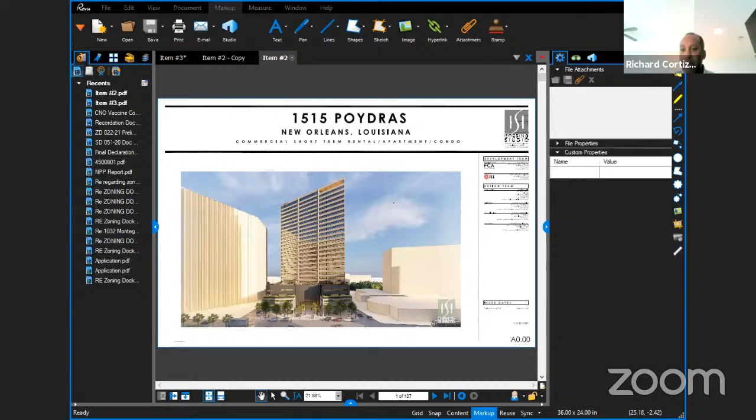Richard, are you concluded? I'm concluded, Chuck. Thank you. I'm sorry, thank you. Good morning, everyone.

This is Chuck Travis. I'm a principal with the Housing Studio, and we're the architect for the project. We have our entire design team with us today. Once we get into the discussion a little deeper, our various team members can jump in and give you additional detail. First, we're going to start with the video that we've sent you.

Hopefully you had a chance to see it, and if not, we're going to start with that. I'll give you a high-level overview of the changes we've made since our last meeting in May. There were 4 main areas that we're going to be talking about.

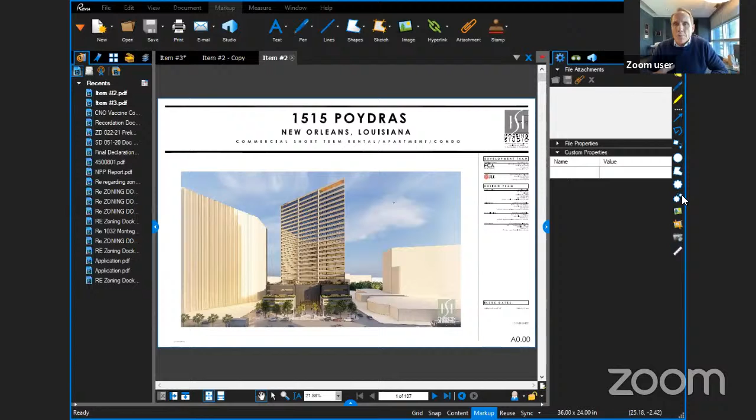If you went through the presentation package, on page 2, sheet A0.01, we tried to capture all the comments you gave us from our last meeting and give you responses to help guide you through the set. We took those comments very seriously, and after going through the design process for the last few months, we thought they were extremely right on point. We took no exceptions with them.

In fact, you empowered us to go further and push the project to the next level, which I think will really show today when we give you this presentation. The 4 areas that I want you to be mindful of as we go through this video to start.

The first one was dealing with the pedestrian motor court. There were several comments last time about this being primarily used for pedestrians during game day events. What's extremely important as we transition this building from an office use to a residential use is that we create a front door to the street there at Poydras. This gives us the opportunity to drop off and pick up residents, and we tried to be mindful of both uses and needs, so we've made that area highly programmable.

The other is the streetscape. That was something we discussed last time about some of the aging landscaping material in need of replacement and repair. Also, your concerns about ADA access around the entire perimeter of the site were certainly important to everyone.

The amenity terrace, as Richard was just mentioning, is something we're adding on the 6th floor, above the garage areas. We'll talk about the form of it, and also the materials and how we treated it to be more sensitive to cues the building gives us, since the existing building has ribbon windows in front and back, and punched openings on the sides. There's a different vocabulary on different facades, and we're trying to be respectful of that.

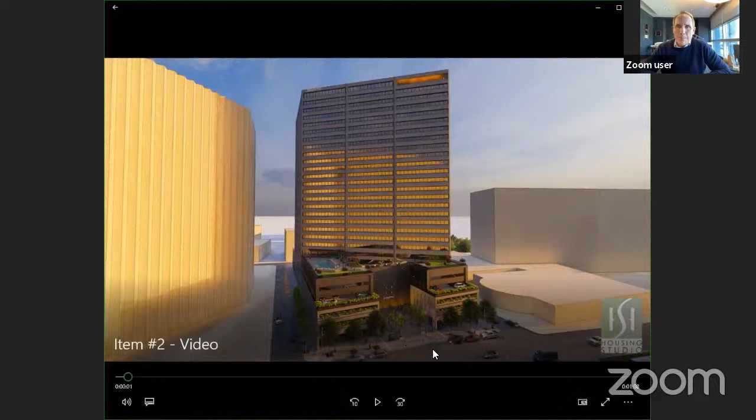So as you see the top of the building, that's the Sky Terrace I was just mentioning. What you're seeing at the street level, those are the 2 levels that we've added on top of the garage structure, primarily because we need to get the amenity terrace up on the 6th floor. We've pushed this facade back on this new addition so that it doesn't impose upon the front.

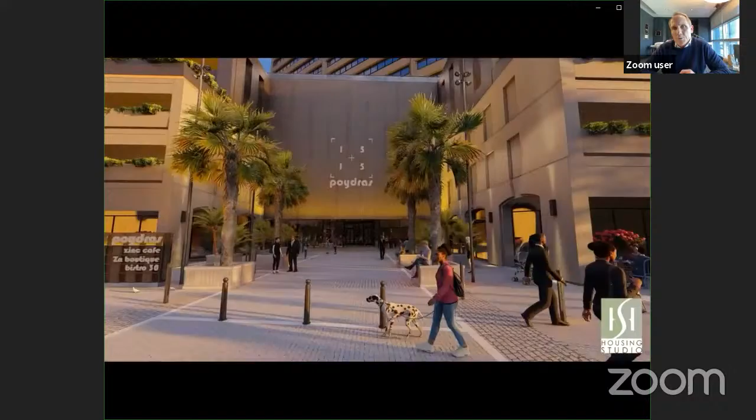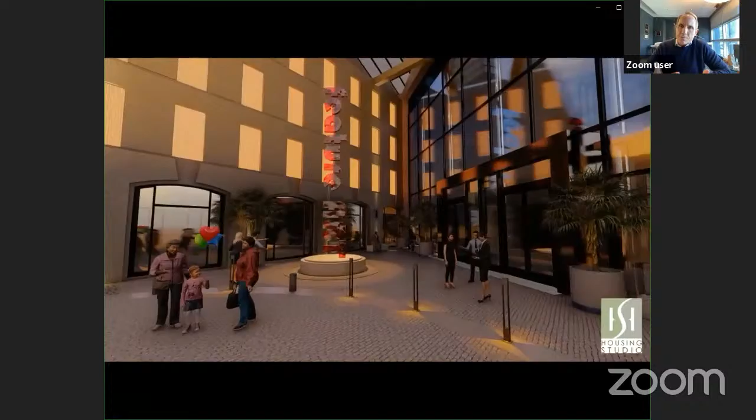You're now coming into that motor court, pedestrian court area that we're talking about, and you see the bollards in place that would essentially turn this into just pedestrian use. This is the main entry. As I drive in, I can drop a resident off or pick a resident up and depart. But it also really creates and sets the stage for the front entry to the building. We're trying to have public art in that space as well.

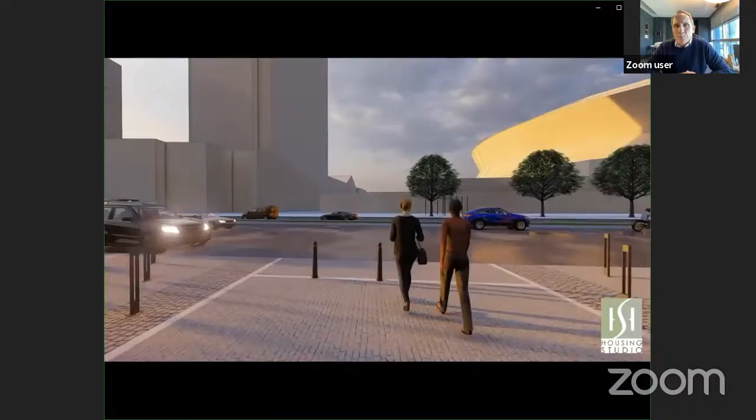Turning radius is somewhere around 48 feet. It will accommodate the largest SUV. We're not intending for this to be a delivery service area - that's not what we want here. That can occur at the loading dock area in the back of the building, but this is purely for convenience and to set the stage for a front door for this building that we're trying to be extremely respectful for.

The other thing I wanted to point out is that on the amenity terrace, you can see that we created openings that start to replicate what exists now currently in the garage structure. We have what we call a hyphen between the 2 garage elements that come out towards the street. We felt like that gave us the opportunity to tie these structures we're adding for the amenity terrace together, and it also addresses opportunities for signage in the front. The idea is not to have 2 foreign objects unrelated to each other, but to make it more a part of the building while being respectful of those garage elements that have always been there at the street level.

And as you know, currently there's retail use all along the ground floor to help animate the street and create a better pedestrian experience. So with that, if we can go to - and I know this is going to be relatively difficult for you to follow with me, but I hope this is easy.

Going back to what we were discussing a few minutes ago, we do see this as an area just for pedestrians, or an opportunity so cars can come in and drop residents off or pick them up on occasions when it's not game day or some type of special event.

Looking at the overall context of the site, it also has streetscape trees currently existing, but we think all of them are in such condition that they need to be replaced, including the larger ones along Poydras. We have a variety of trees in that area of different sizes and degrees of health. We think it would be better to create a larger area for the planting, improve the landscaping, give us an opportunity to do some lighting, and do an overall improved streetscape along Poydras. We also have a monument sign that's going to be replacing the one that's out in that area now.

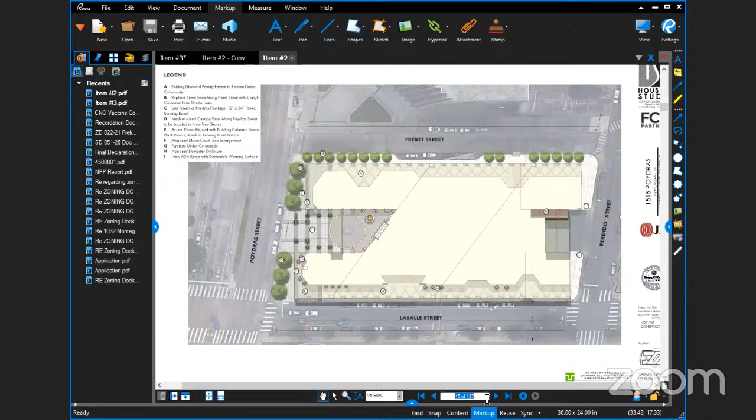So you're looking at an enlarged plan of the motor court, pedestrian court area. As you can see at the street, we have the ability to have removable bollards. So for certain events, we can close this area down and let it be fully pedestrian.

If you look at the turnaround radius closer to the front door that you drive under the bridge connector, that's about a 48-foot dimension, as far as the diameter is concerned. We do have the ability of having public art as a part of that space as well.

You can also start to see some of the things I've mentioned previously - we're taking cues from the structural grid to set up patterns of these materials, and we're trying to select materials and colors that are representative and calm, to accent the building and work successfully with the color palette that's existing today.

Just so that you know, we are just leaving the pattern that occurs along Freret Street and LaSalle Street. That's existing today. What we're doing in those areas is just adding additional lighting.

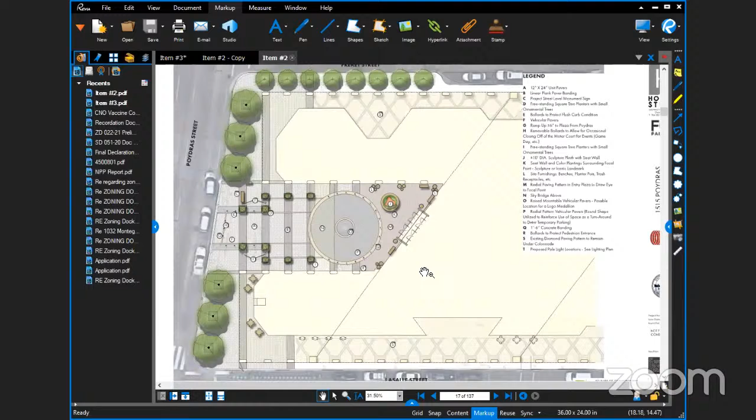So if we can go to the next sheet, which would be L1.6, and what number is that? 21. 21, please.

Just to give you some ideas of precedents that we've looked at for planting material, how we're going to be treating some of the selections for the materials along Poydras Street and any other areas where we're going to be having accent paving further into our building at the motor court. These were precedent images that we used to convey to our client what we were trying to accomplish, and also to give you an idea of the material and the level of finish that we're thinking about.

And if you'll go to the next sheet, which is 22, please, which is L1.7.

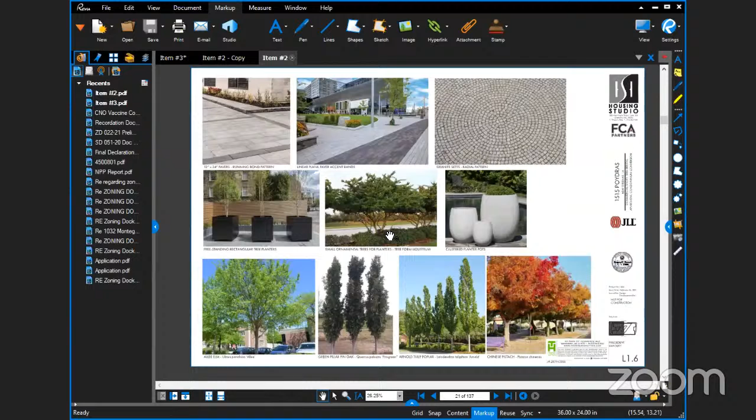While we're at precedent images, we're looking at the amenity area, which would be on level 6, looking at outdoor activities, shade structures, which are extremely important, as all of you know, because you live in New Orleans and know certain times of the year that's extremely important. Having nice green spaces that are secure, multiple activities, grilling stations. We're also adding a pool in that area, which is why it's on level 6, so it gives us enough clearance to not take away any parking in the garage.

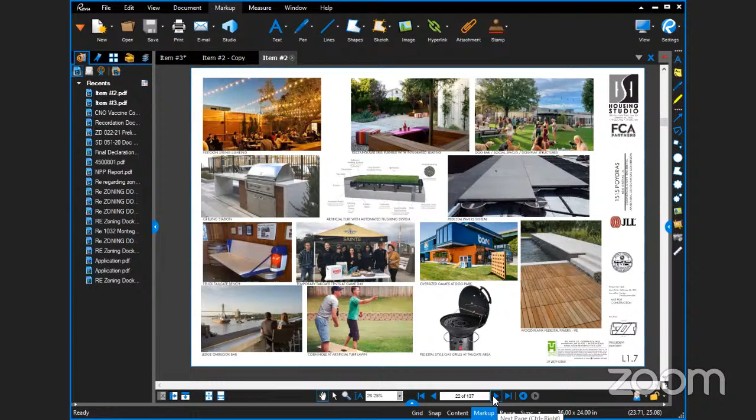And we'll go to the next sheet, which is C1-1B, which is a more detail-oriented sheet, which is sheet number 14. I'm sorry, I should have given that to you, Joseph.

This is representative of what we're doing back in the loading dock area. I was mentioning about ADA accessibility. Right now, the curb is where a handicapped person can't transition off of it, so we're rebuilding the entire area. We're tearing out part of the existing concrete, extending some sidewalk areas, and getting the ramps in position. We took this comment very seriously, and this is something we'll be doing in this conversion as well.

If we go to sheet L1.4, which is page 19. Joseph, thank you.

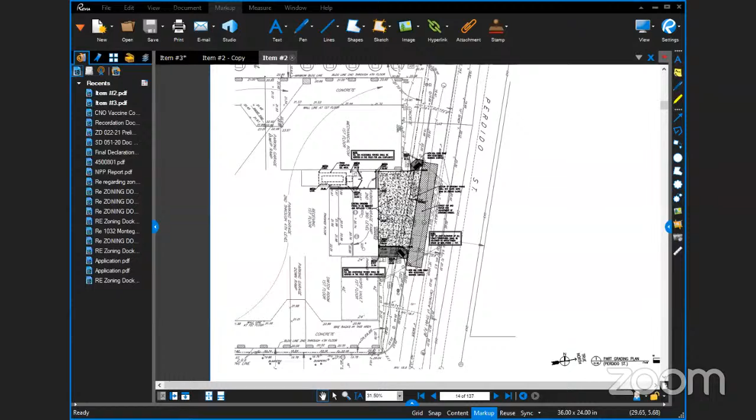We're now moving on to the amenity terrace. Last time we were discussing this, we had structures for shade, and I should also mention that we included all of the sheets that we replaced with the new sheets in the set at the end of the presentation package we gave you. So if you want to go back and do a comparison, we've given you that information to be able to do that.

But these shade structures have been designed so that they're more complementary to the building and work better with the architecture, we think. The use of materials certainly matches what we're doing to help shield the new structure that we're employing to have this amenity terrace.

The uses up there vary from outdoor grilling stations to game areas to a swimming pool, and sunshade type features if you want to have a cabana.

We're also trying to incorporate a dog area because, as you know, everybody has a dog these days. So we have a dog area and also a bar area so you can sit in the shade over there and let your dog play in the outdoor space as well.

The thing that's probably most important to you, if you recall from our last presentation, we had stairwells for egress purposes off of these terraces. They were actually on the front facing portions. We've incorporated those into more strategic areas so they don't interrupt what we're doing on the exterior elevations, and they work with the parking below so we have very minimal impact on parking, preserving spaces for us. It's an element that somewhat just goes away, as opposed to being a design feature like what we had previously.

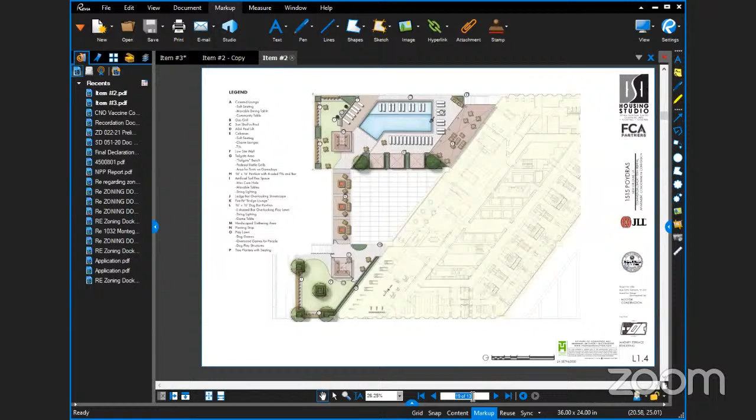Just to back up slightly, the reason we're having to do this is because we're putting the terrace on the 6th floor, which is actually 2 above the existing garage structure itself.

So we're having to clad the steel structure with some type of material. We're doing that with zinc panels because zinc is a natural material. Just like the concrete on the building, it will weather and patina and take on its own character, just like our building has done over time.

We've also integrated two different types of zinc panel, one corrugated, one a more solid panel. We're trying to create different textures and break down the scale of that structure, treating it with materials similar to the way Gordon Bunshaft broke down those garage elements, using solid voids and recesses to break down the large mass coming to the street. We've tried to replicate and complement that, while being true to what the original building is today and what we're adding to it.

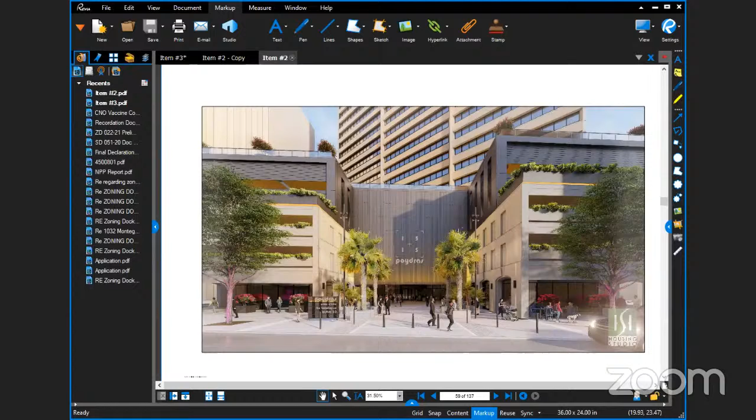So if we'll go to the next sheet, please, which is A5.03. 62, please. That may be the sheet right there. I don't know if you can... there you go. That's the one I wanted.

We've also integrated the use of a glass rail on the top. One reason is to help reduce the mass itself, and the other is to preserve views up there on the amenity terrace. Obviously, you want to see out and look at New Orleans as much as possible.

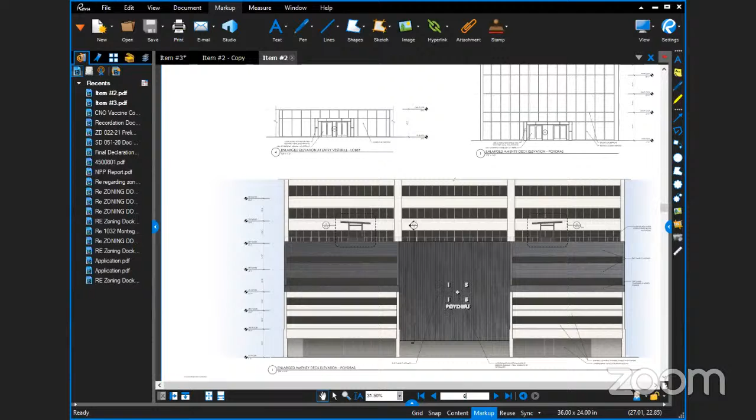Sheet 63, which is 5.04. So when we turn the corner, as I mentioned earlier, we have ribbon windows on two sides and punched openings on the two side streets. So we understand there's a different vocabulary working here.

What we've tried to accomplish is to be respectful of that and take cues from it. In this instance, we have these darker panels, which will be a different type of zinc material. We've inset those, and I'll show you a wall section in a minute with that detail. It's perforated, so it will read totally different than what's framing it. You'll also see the shade structures we're proposing on the amenity terrace itself, and I'll show more details on those shortly.

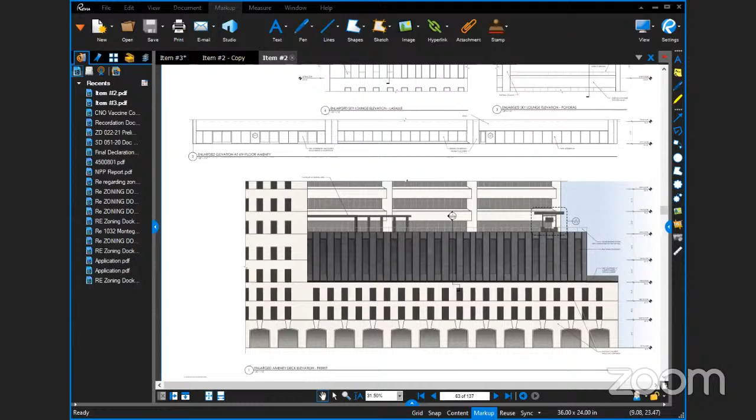If we can move to the next sheet, 64, please. This is more information on the zinc panels, and you can see some of the corrugated material that is perforated, giving some transparency, and then some of the more solid panels of zinc. We think this is a really nice and complementary material to use on the building.

This is the side elevation, I believe on LaSalle Street. We have a shorter structure there than you'd see on Poydras Street. You also see where we've extended this panel out to the front because of load capacities and structural limitations in this area, requiring us to remove some of the concrete panels on the uppermost level of the garage. It's hard to see in this drawing, but there are score joints or breaks in the building, and this panel follows that score joint that goes back into the high-rise tower itself.

The next sheet would be 505, that's 7.02, which should be your sections. 66, please.

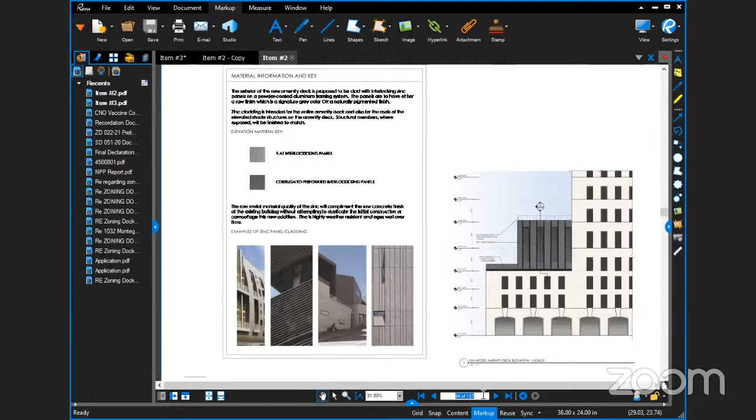What you're looking at is the actual wall section cut, particularly on the right-hand side, where we have the punched openings. This is where those panels will be set back and have perforated panels, so there's enough depth to get nice shadow lines. It really starts to represent some of the ways Gordon Bunshaft treated the openings on the side of the garage we were looking at from the motor court earlier, paying homage to how the building's vocabulary is set up.

The wall section on the left represents where you drive through the motor court underneath the bridge, showing that's a solid panel. That bridge connects the two sides of the garage together. It's a solid panel, so we'll have solid zinc panels in that area, with a different material and a more vertical type of installation there.

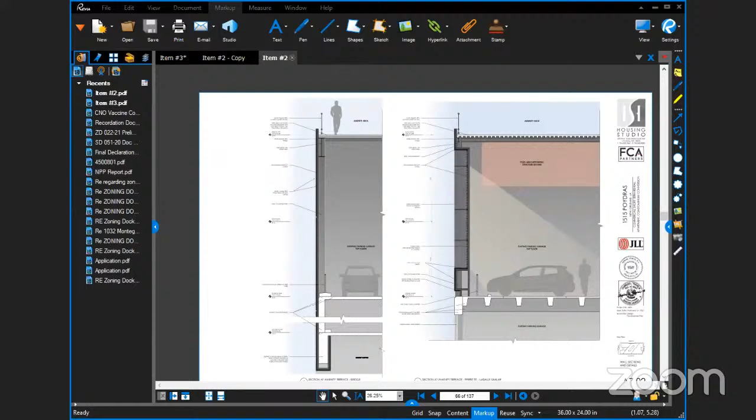I think I've addressed the egress stairwells and talked about the outdoor bar areas. Let's go to sheet A2.15, which is sheet 44.

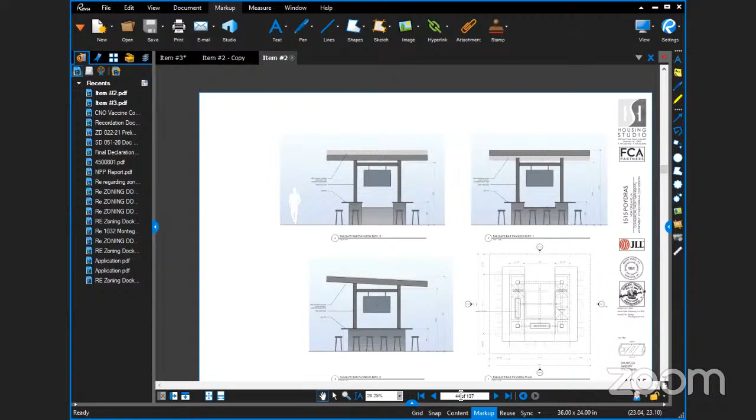This is a better representation of some of the shade structures we have on the pool amenity area. We're going to have cabanas that won't have the tilted roofs. In fact, for the cabana roofs, we're hoping to have essentially a trellis that can be operable, so you can open it to the sky, or on really warm days close it down so those spaces become sunshades. This gives an opportunity to program the spaces depending on weather and time of year. These structures will be more permanent, with bars in areas like the dog walk area, the dog play area, and around the pool.

So if we can move on now to sheet 2.14, which is 43, please.

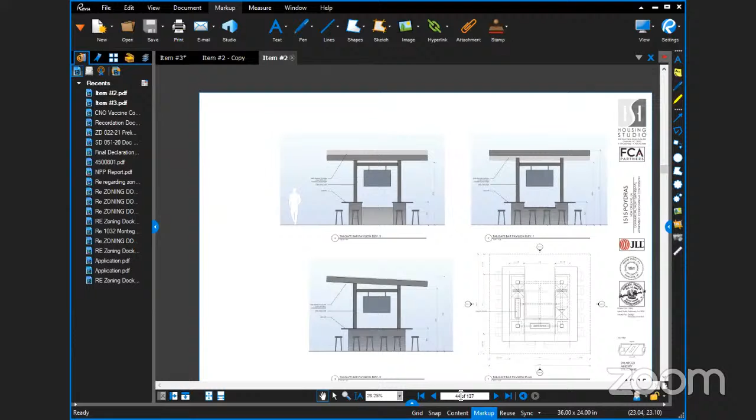We're proposing to take that entire band of ribbon windows out. We're not altering the concrete precast panel at all. We're replacing whatever we need for additional barrier height for a handrail, which will be clear glass in that area. We're doing the same thing on the bottom at the punched openings, taking the windows out and installing a glass rail in those spaces as well.

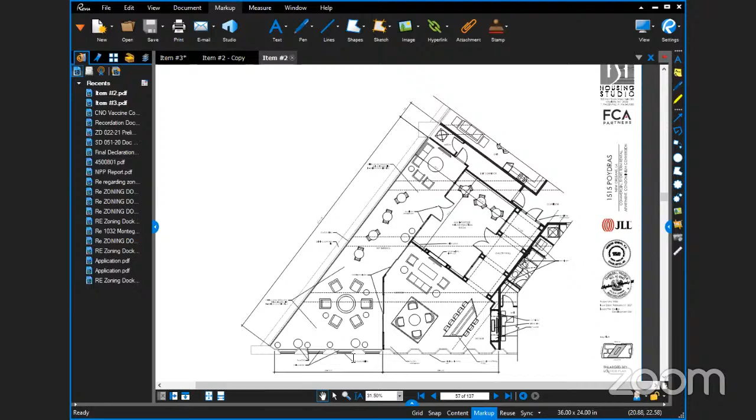If we go to sheet A500A, which is 57 please. We're going back to that front. If you'll zoom back out a little bit, because what I'm trying to emphasize is the actual amenity terrace at the top, you can see where we removed that ribbon window.

As you turn the corner, we'll be taking out three windows there that are punched openings. The idea is that we're going to treat the ceiling so that at night it has a very soft glow to it, not something that's overly obtrusive. Last time we were proposing to do some type of frame around the opening itself. We have moved away from that to be more respectful to the building.

The other thing you might note is that there's signage on the left-hand side at the very top, a proposed location for it. We're wanting to have signage as you drive into the motor court area, pedestrian court, right in the middle of the hyphen, and then we'll have that monument signage right at the street along Poydras as well.

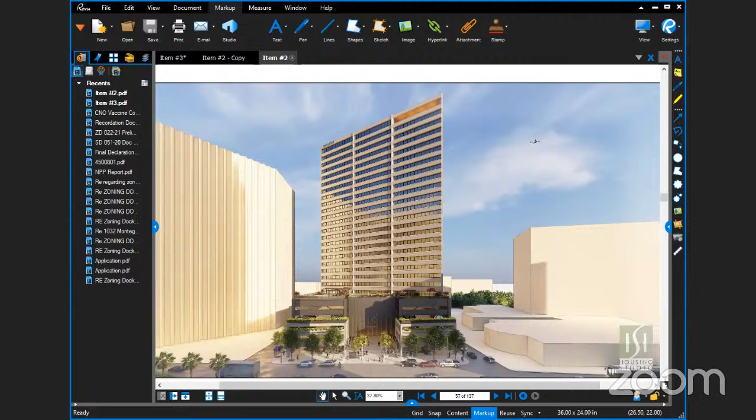So if we go to A5.01, sheet 60 please, Joseph. If you can concentrate on this, you can see the windows on the upper floor where we're removing the punched openings. On the right-hand drawing, I don't know if you can see all of that elevation on your screen, but it should illustrate where we have the signage I just mentioned, and also show that we're removing that ribbon window.

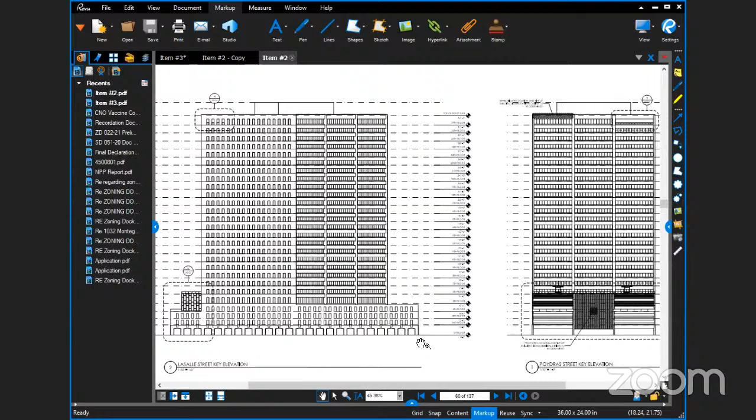And A500B, 58 please. Julia, just zoom down.

This is actually a later in the day shot just to show you the intentions of lighting. We're trying to be very respectful of the building. Obviously, with residential uses, we don't want a lot of windows capturing light from residents at night, so it'll be a soft glow that will create a warm and inviting space that will make people feel safe living in their new home.

And then the amenity terrace on the top, or the Sky Terrace, will be softly lit, like I was mentioning a few minutes ago. With that, I know there's a lot of information. Like I said, we have our entire team here, so if you have specifics you'd like answers to, we'll be more than happy to answer those. Thank you for enduring a very long presentation.

I have a couple of questions for your landscape architect. Okay, that would be Ryan Thompson, who is with Thomas and Hutton.

Hello, yes sir. Hey, it looks like y'all are trying to replace the trees on Poydras, and this rendering is a really good spot right here because it's showing 6 street trees, but your plans only show 4 on Poydras. So I think in terms of the zoning ordinance, let me start with Poydras. You still need to have 6 trees, and there's a process you have to go through, because the trees currently there, the previous plans didn't show trees being replaced, and now y'all are replacing them all instead of just the ones that are in poor condition on Poydras, which is the one on the corner of LaSalle and Poydras. So we have a process you have to go through to apply to remove healthy trees.

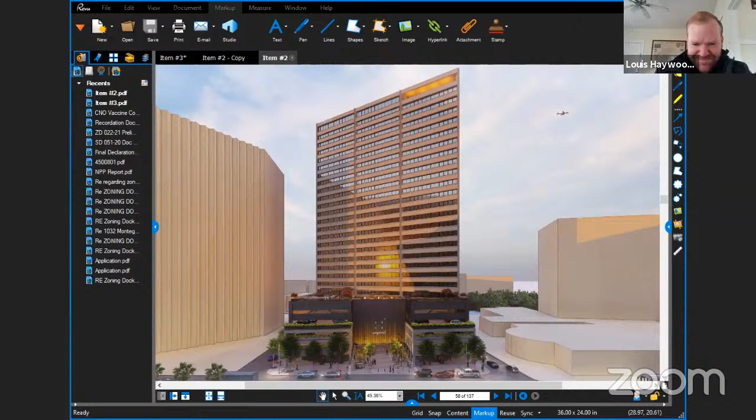But yeah, all right, well, nice job. Hey, related to this conversation, I feel like I can't recall if bike parking and circulation was discussed last meeting, but has that been contemplated in this current design iteration? Both the storage and thinking about bike visitors, pedicabs, things like that.

But yes, we have accommodated bike parking actually throughout the building, because as you know, a lot of folks have bikes that are expensive and will want to have them secured. So we'll have a combination of some at the street and then some within the building as well.

And Hannah, how many spaces do we have total? Yeah, we're required to have 86. 86 spaces is what we provided for, and 69 of those will be permanent. Great, so that's a key component of this building. We're hoping that people walk and cycle more than driving a car. This is one of the reasons why you would live here.

And the last question I have in relation to your amenity space, what's the contemplated level of access? Is it exclusively for residents, or would it have a public kind of programming as well? It's residential use and their guests, so it's for the residents of the building.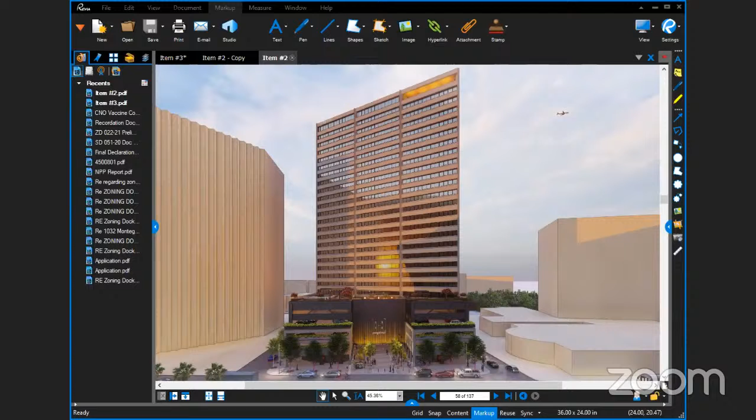Item number 3 is design review docket 1021 for a property at 6600 Belgrade Street. This is a public park, cutoff playground, and that's the reason why it requires DAC review. We have Chris Afish signed up to speak on behalf of the application, and also Jacob Rowland is here.

Chris, do we still have you? It seems that neither Chris Afish nor Jacob Rowland are online. Hey, this is Jacob, I'm here. Okay, all righty Jacob, I know Chris was on earlier, he may be having some technical issues.

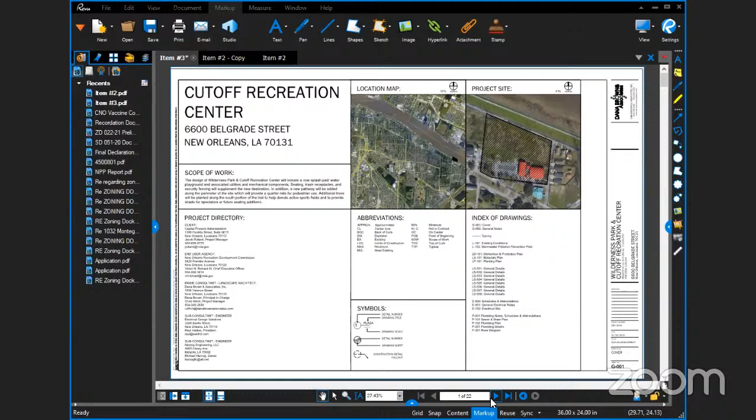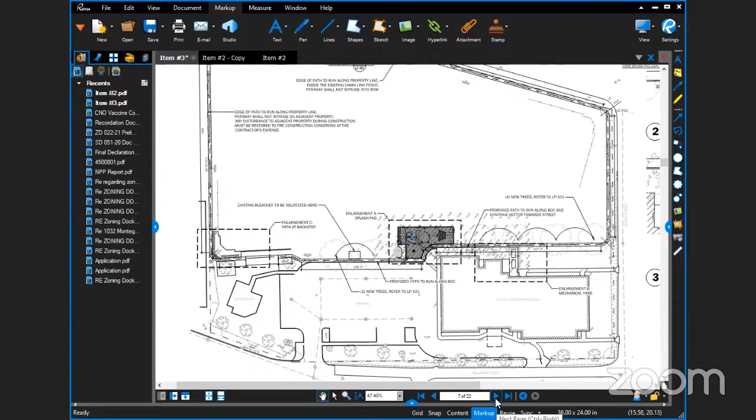Well, really, it's just a public playground, so we're going to be looking at that. Do you want to go over the scope of the project and then the committee can have a chance to ask questions? Yeah, so the scope is we're using state capital outlay funds to install a splash pad adjacent to the Cutoff Recreation Center. It'll be the first splash pad in NORD's portfolio. We also have secured some bond funding to add a perimeter 6-foot concrete walking path around the property, so it'll go around all the ball fields and tie in to make a connective loop. We also will be repairing some fence. There's a chain link fence that's damaged all along the perimeter, including some backstop fence and things like that. So it's a pretty light project as far as scope, mainly centered on the splash pad.

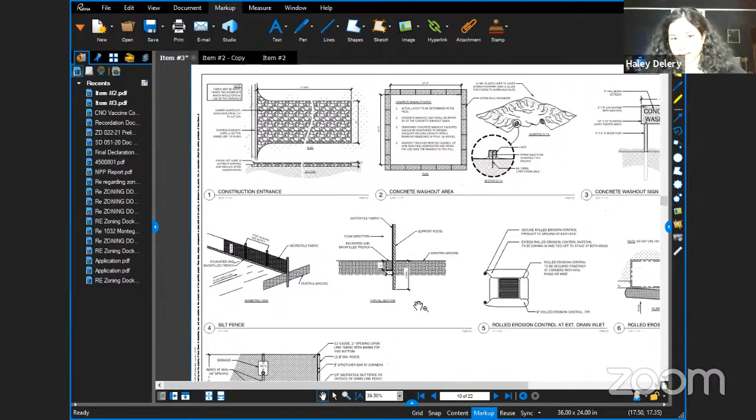Okay, thank you. I believe the fence had been recently repaired within the past couple of years. Is there anything that's going to be done this time to keep it from toppling over? It was partially repaired due to Isaac, so it'll kind of be replacing in kind. But yeah, the fence was recently repaired from Isaac.

Sorry Jacob, can you hear me now? Yeah, hey Chris, sorry about that. I had to exit and rejoin, so I'm not sure what I missed. Just kind of gave a rundown of the scope with the splash pad. Haley had asked, some of the fencing was recently repaired, so I think she was just looking for maybe a detail on the idea that we're replacing like with like, but her question was anything to be done to keep it from falling or falling into disrepair again. I think storm damage is a different factor completely, but.

Yeah, I mean, I know that we're wanting to put in an 8-foot high security fence around the splash pad, and we're going to go with basically a black chain link. I don't think we have the money for like a picket or metal fence. Additional funds are going to be used basically to repair any other fences around, but that's going to be contingent on what we get our bid prices at. It's going to be an add-on, but the splash pad will have a security fence.

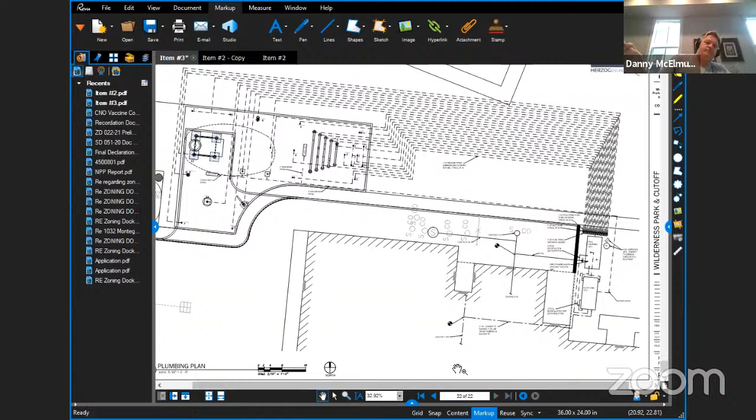And then there, the splash pad pipes. On that last sheet, the diagram shows them kind of going underneath the locations for those new pin oaks, I think they're white oaks. So is this just a diagrammatic relationship, or is there a way to run those pipes between the building and the sidewalk to keep them from being in the tree root zone? There's a lot of other utilities under there. We're probably going to keep it out in the field just in case something does happen, they break and need repaired, that way we won't have to tear out the concrete. Are they going to be in conduit or something?

Yeah, okay. But we will make sure that there's adequate space away from anything we plant in that area. And I'm going to adjust it on the plans. It's something I'm aware of that needs to be addressed. Okay.

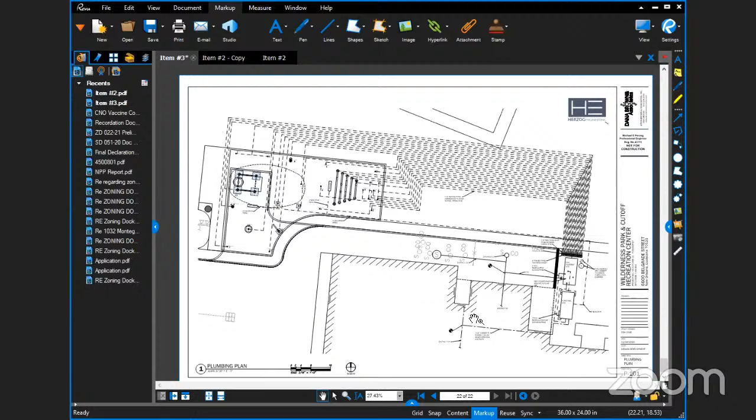Yeah, it just needs to be addressed because white oaks have really big root systems since they have such large canopies. I think we will change it to probably a Nuttall, to match the two existing ones on site, but I have to go back to the site and verify.

So y'all aren't addressing anything other than what's on the field or around the building? Is that what the deal is? Yeah, it's basically that one splash pad that's kind of an L shape, and then that perimeter trail. Again, if we have funds available, we'll be replacing some fencing. We're gonna do a site visit this week and take inventory of the fences and which ones need to be prioritized.

Yeah, let me draw on the map. This area along here, this fence is terrible. And right here on this corner, I don't know if those pipes are still there or not, but I know people like to sit there and play board games right on that corner. So it seems like this is a golden opportunity to address that with maybe some more permanent features other than concrete pipes as seating, and really take on that fencing.

Is there fencing around the field? Is that what y'all are talking about mostly? Yeah, there's fencing all along the north side and the east side. I know the east side is pretty much not fencing because it's so fallen down. Is this going to be where people can access this walking trail at any time, or is it going to be closed off at night? No, the fencing really isn't continuous. They'll be able to access it during the night.

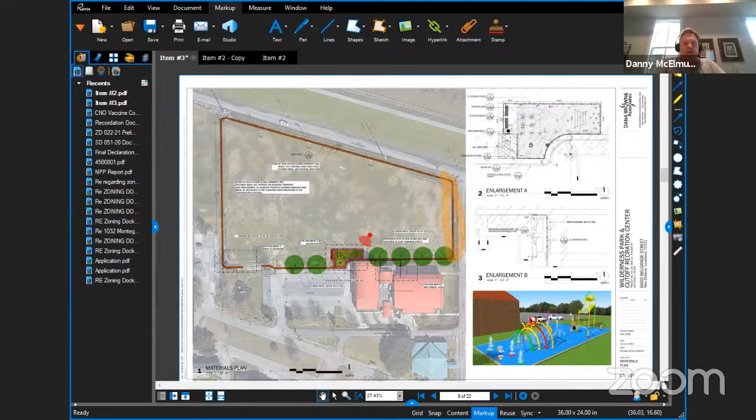Keep the kids in? No, they're not staying in if it's not all the way around, right? Well, I could see where you'd have fence along Patterson to keep kids from running into Patterson, or maybe in that little section where you keep kids from running into the street. But along the front, and along Belgrade and General Meyer, there's no point in having that fencing anymore, and it just looks terrible. I was just thinking with the playground, just in front of it between General Meyer there.

You talking about right here? Yeah, in that little area right there? Yeah, that front left side. Yeah, I could see that if it looked good, but y'all aren't even addressing that, right? It's contingent on funding. We'll identify all areas that are damaged, and then it'll be an add alternate to the project.

So what I'd like to see, in terms of how people use sidewalks, I'd like to see that northwest corner squared off a little bit, so you don't end up in that little angle. Kind of do a double radius so you get like a 90-degree in that corner. So you cut off that diagonal a little early and square it off, if that makes sense. I can draw it. Yeah, please.

Request. Remote control. I don't know if I can.

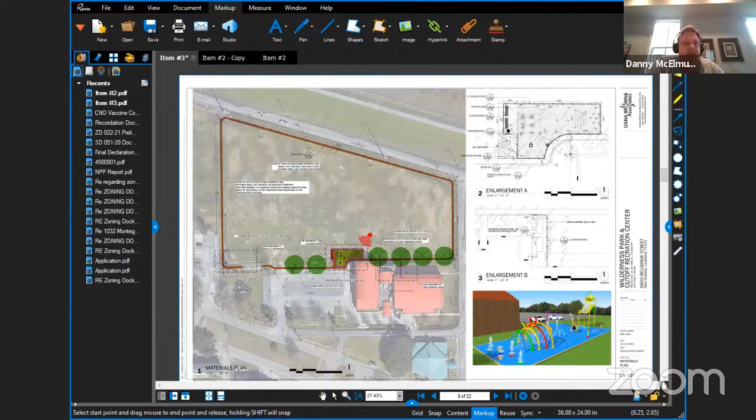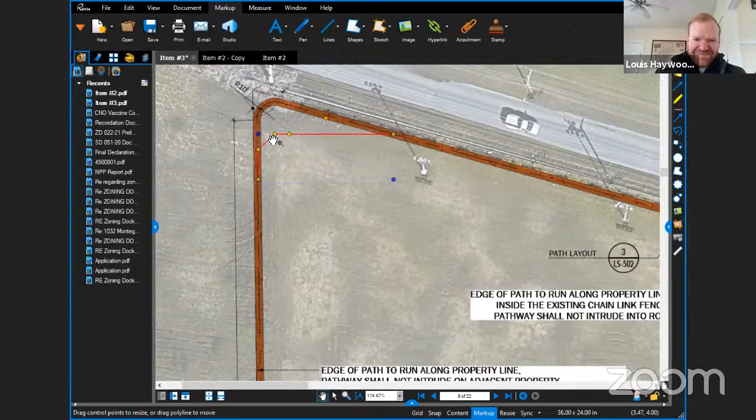It's easier to see if you zoom into that corner, maybe on sheet L-7. So what I would do is once you get past this light - this will save you some money too - go like here, and then a little 10-foot radius, whatever you're gonna do, right there. So just a little cutoff will look good.

Yeah, I just need to double check - we have some field size put in there, and if that's not conflicting with any of that, then yeah, we can do that.

And what's the length of the trail? Let me see, I have it right in front of me. It's about 1,600 linear feet.

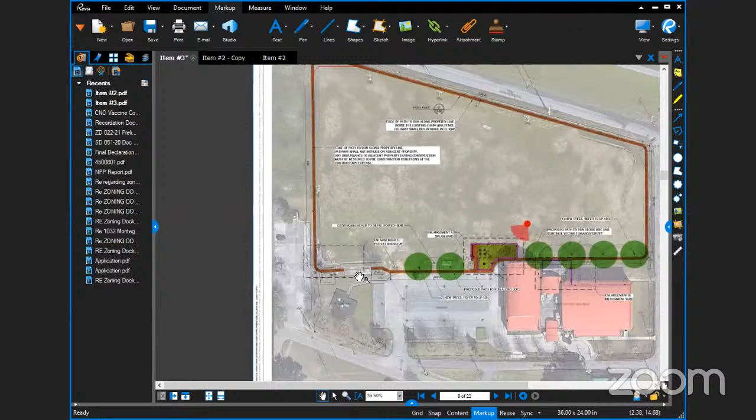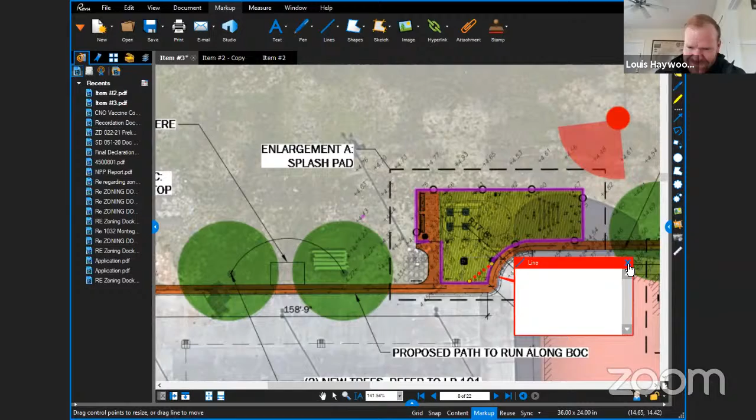Yeah, if you could even kind of shave this area, right here, this might be nice too. Well, I don't know if this is all open or what, but this is a little awkward here, that little piece, down by the splash pad. I guess that is.

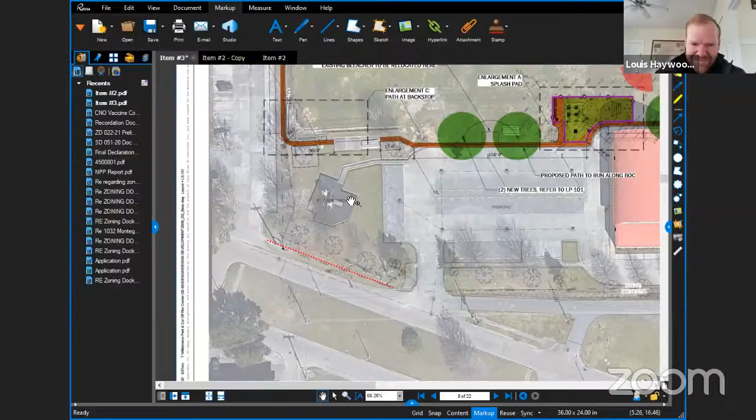Yeah, if you guys could have the money, we just have this one missing piece of sidewalk on the whole street, on this whole side of the street right here. If we could get that sidewalk in, that'd be real nice. I'm divorcing myself from this process on General Meyer. I guess it's kind of missing again later, but anyway, might as well at least build the sidewalk to the park.

That's all I got. Okay.

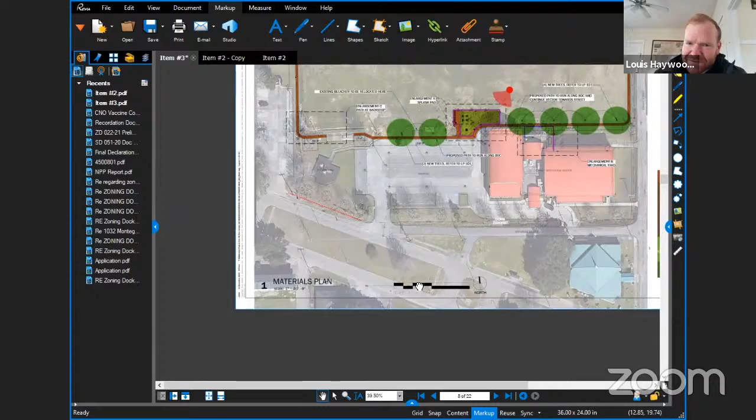Yeah, if I could just double down on the fencing comments, irrespective of funding, but from a public design perspective, to move away from chain linking as much as possible. I question if the splash pad really needs it, but I guess more so to the splash pad. It's an exciting technology to introduce, I didn't know it was the first one in the city. So just a general question, is there a measure of success that will be measured to introduce them at other sites, or what's kind of the strategy there?

NORD really wanted to move forward with it at that site based on public input. So I just think the measure of success would be maintenance capabilities, and we're really trying to address that on the front end. But NORD's ability to maintain, and then obviously the usage and the efficiency as well, water reuse and that sort of thing. So it's the first one in their portfolio, so we've gone and taken a peek at Cool Zoo and a couple of other spots to kind of pull some ideas.